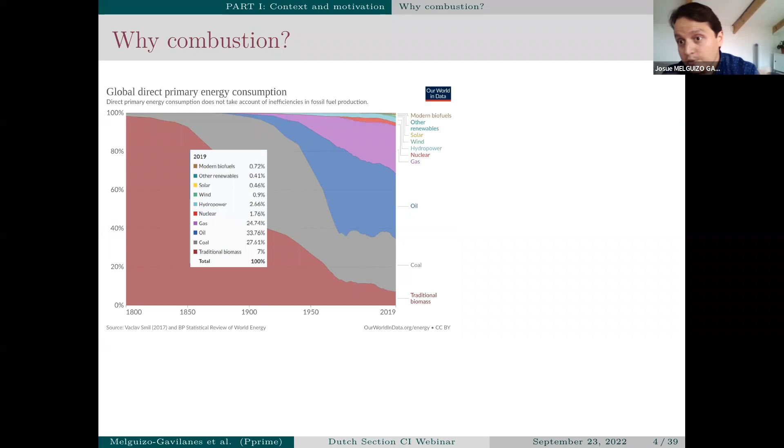So we went from wood and all these things to now a mix of oil, coal, and we continue to burn biomass. The takeaway is that we really burn stuff to sustain our lifestyle. Even though we have all this push for going electric, in the end you have a primary energy source and a primary location where you produce this electricity that then will feed all these other things. And typically, unless it's really coming from renewables, it will most likely come from burning either natural gas or coal, right?

This sounds a little bit of a pessimistic statement, saying that the picture is unlikely to change, but in the near future, what I would say we really need to push for is efficiency, right? So we've been burning things, we know how to burn them, we have pretty efficient processes, but we can continue pushing that efficiency. And one way of pushing for that is investing in low carbon or biofuels or hydrogen

enriched, which is an actual initiative in the aerospace sector, for example, or maritime, where we have significant energy demands. And then, of course, there's the carbon free, where you go full hydrogen, or you take ammonia as a carrier and then you convert it into hydrogen at some point in the process, right?

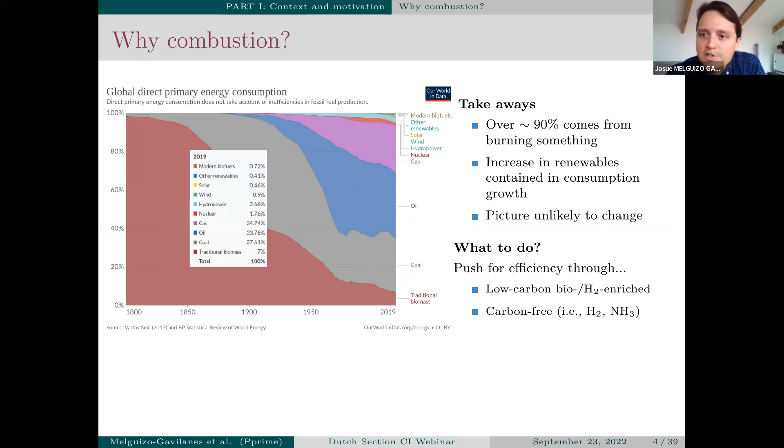But really, with this picture, there's a push for efficiency. That is not an isolated idea that those of us doing combustion are using to sustain or justify our research, but something that has actually been studied. There was a recent article in the Financial Times in which they concluded kind of the same thing I've been saying, right? That efficiency measures could be a very efficient tool to curb CO2 emissions.

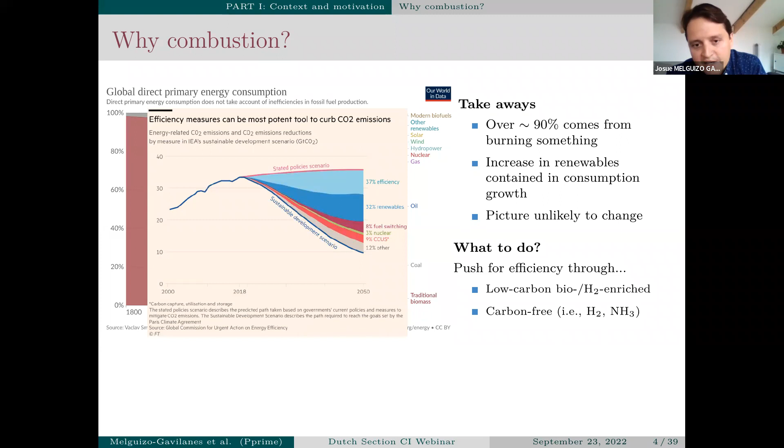So that push for efficiency that most of us in combustion are trying to advocate for, I think is definitely a valid way of achieving our sustainable development goals, right? So all this begs the question: is the future electric? I already discussed that a lot of this comes from actually burning something and then you just plug it in at home or at one of these charging stations.

And in my opinion, we really need to think inclusively, and depending on the location where you'll be using the energy and your end use, you will have a diverse mix where the actual solutions could come from or could best deliver for the needs that we have.

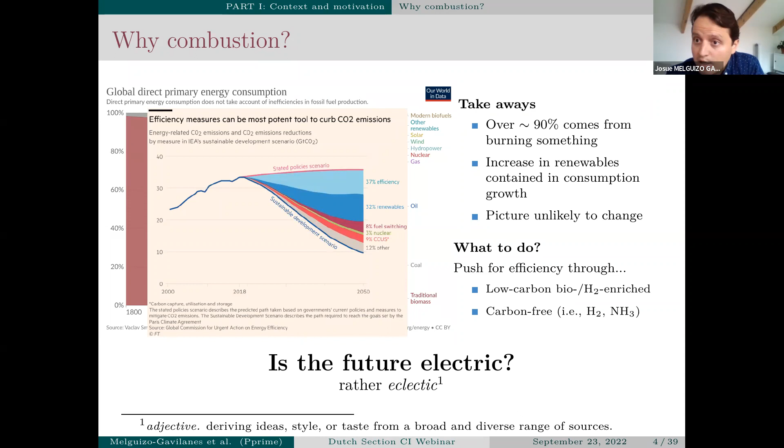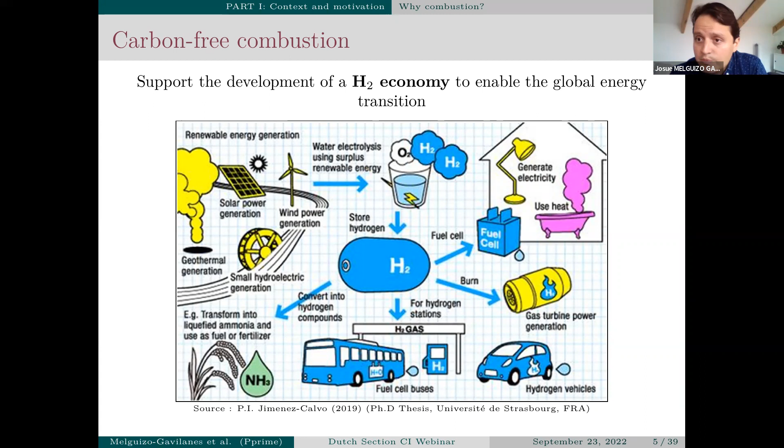Okay, regarding carbon-free combustion, this is the picture that the European Union pretty much dove into head first. It's based on producing hydrogen via electrolyzers fed by renewable energy and then trickling down the value chain to every single aspect of society. So from public transport to agriculture to residential heating, right? And of course, the potential of using it for your own cars with hydrogen vehicles.

And when you have a gas that is very light, you either have to increase the pressure to put inside a container the same amount of mass that will make it competitive with other fuels like the liquid fuels we currently use. But obviously going up in pressure could lead to potential safety issues. The other option would be, okay, let's liquefy it. But in the case of hydrogen, we need to get to cryogenic temperatures, and that's very expensive.

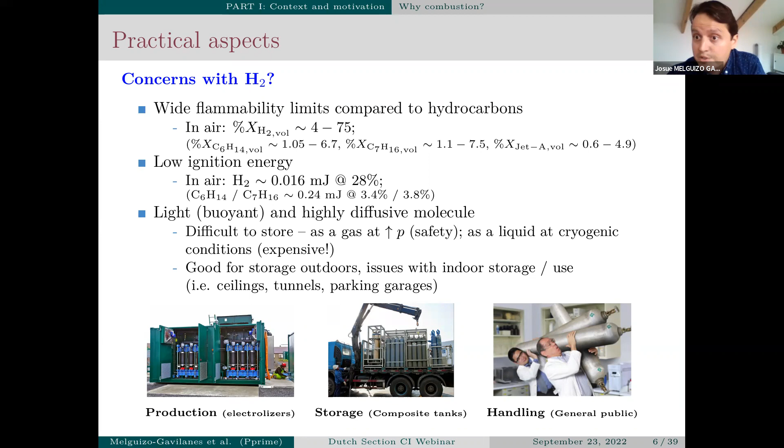Part of our job as combustion scientists is to make sure that we understand the risks so that we can relay all those learnings to policymakers and those who are writing the codes for safety distances, etc.

So you really want to make sure that when you're dealing with potential risks, you understand them properly. And the thing is that in each of these industries, and in most industries in the productive sectors, you will be handling fuels, and whenever there's a fuel present, there's the risk of a fuel leak and potential ignition.

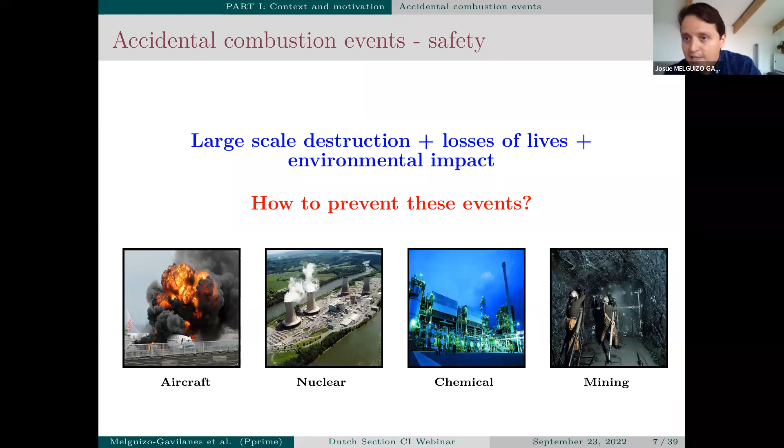So as I said, our role is to try to understand how to prevent those events, right? And this is just a bit of an overview of how an accident takes place, and I'm just going to go very quickly through this flow chart. So you typically, as I said, start with a combustible mixture that could be inside a container, right? If for some reason you have a rupture or there's a human error, whatever, this leads to a fuel release, then if there's an ignition source, that will create a flame.

If the flame interacts with obstacles, then there's an increase in surface area that will in turn increase the burning rate. If you increase the burning rate, you accelerate. If you accelerate, you could potentially transition into a detonation, right? So typically in accidents, this is what would happen. You will go through this route of thermal ignition, flame propagation, acceleration, deflagration to detonation transition, which is one of my core research activities, and then towards detonation propagation.

If you're storing those fuels at very high pressures, then you could potentially ignite a detonation directly, but this is less likely, okay? And most of the stuff that I've been working on is really motivated by safety aspects. But since my arrival to Pprime, I've also been looking at the potential application of detonations to propulsion, which I will give you a little bit of a side note on at a later slide.

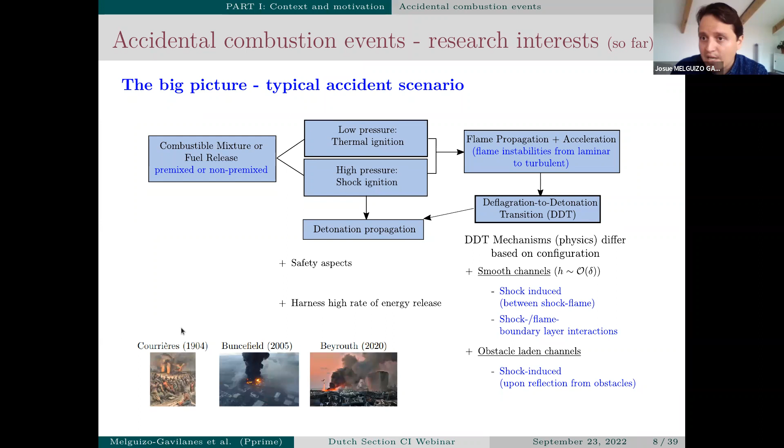And the main takeaway from this is that accidents have happened. The largest accident in France, actually, in a coal mine in 1904. Buncefield, which was an accident in the UK in 2005, in which there was forensic evidence of a potential detonation in open space. Before this investigation, people thought that detonations were very unlikely to take place in accidental scenarios, because you need confinement and you need proper reflection of triple points, as you will see later.

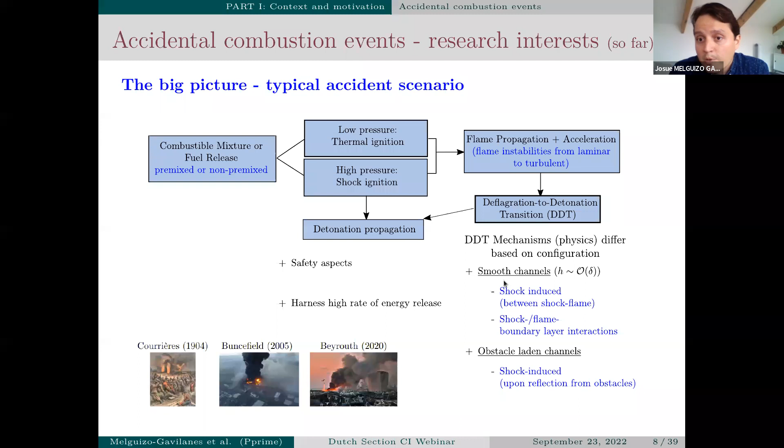And the accident in Beirut, which I'm sure you're familiar with. So that was just improper storage of hazardous materials that could lead to significant property loss and losses of lives, as I said before, right?

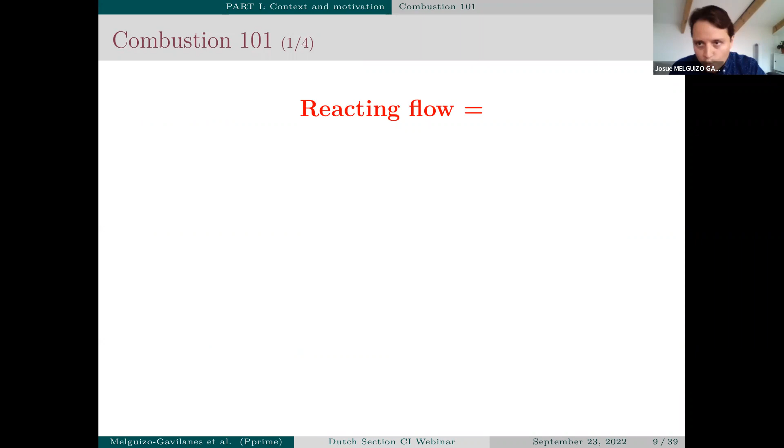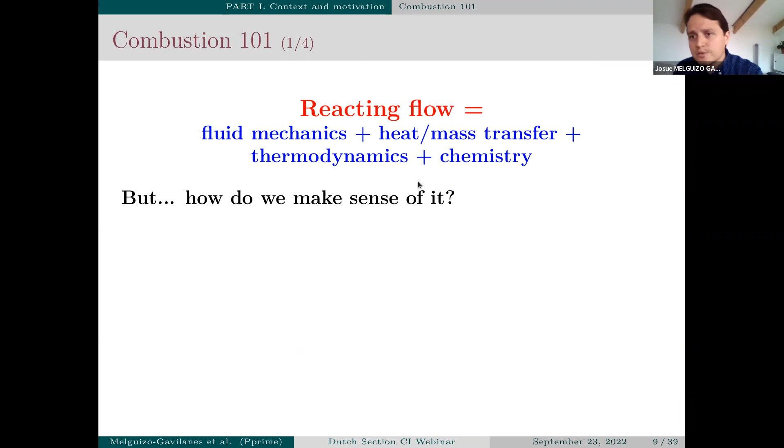So a very brief crash course on combustion so that we make sure that we're on the same page. Okay, so reacting flow, we all know, is fluid mechanics, heat transfer, thermodynamics, and chemistry. It's the combination of those four pillars of science. How do we make sense of this in addition to the typical experiments? We have continuum mechanics, right? A mathematical description of nature. So we conserve mass, momentum, species, and energy.

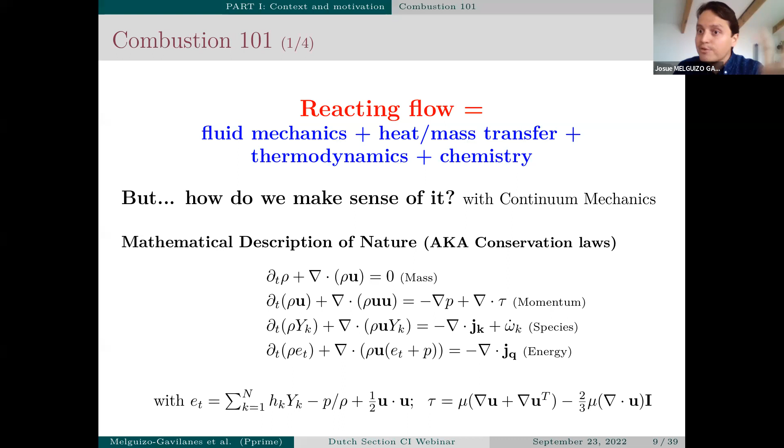And then depending on the physics that we're interested in, there are some terms that you could neglect or that you need to keep, right? Typically in detonations, you neglect diffusive terms. You're not interested in heat and species diffusion because of the timescales at which the relevant physical phenomena take place. But in the particular case that we're looking at, we will keep those terms because we're looking at diffuse interfaces, okay? So that's going to be important to keep in mind.

Now, some of the challenges are different from what you typically see in cold flows, where you can actually resolve all the scales and you have base solutions that you can use. Reacting flows are a bit more complicated because one of the most pressing issues is the size of the mechanism. If you really want a proper description of the chemistry, you need to carry a significant amount of species and reactions. And for each species that you carry, that's an additional equation in the system of equations that I showed in the previous slide.

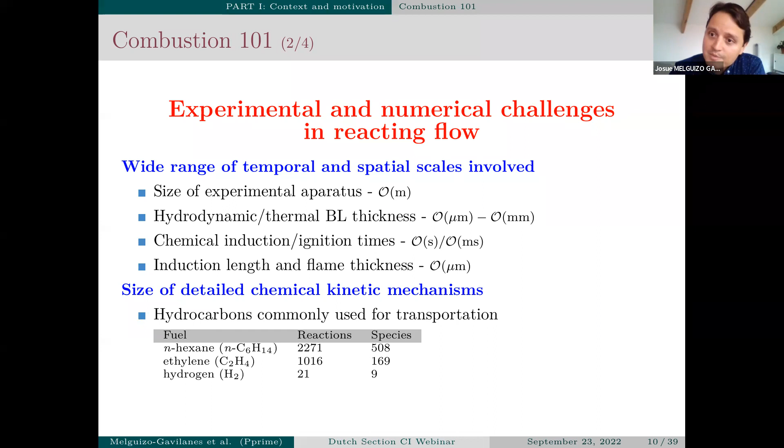And then if you want to resolve the scales, you have to go from the size of your experimental facility, or in industrial settings, the size of your plant, which could be a few tens of meters or more, depending on how much you want to simulate, to actually resolving reaction fronts and reaction zones. And in detonations in particular, it's very important to resolve the front because that's what leads to the typical cellular structure of detonations that I will explain in a few slides.

All right, so if you take those equations and you seek traveling wave solutions, you have two limits. You have the limit of deflagrations, which is what people are most familiar with, right? So the propagation physics is by heat and mass diffusion, right?

And you have detonations, which is the other end of the spectrum, where the physics of propagation is shock-induced ignition, okay? So you have a shock that brings your thermodynamic conditions to a temperature and pressure such that your reactions get initiated right away, right? So across this detonation interface, you typically have a density increase and a pressure increase, okay?

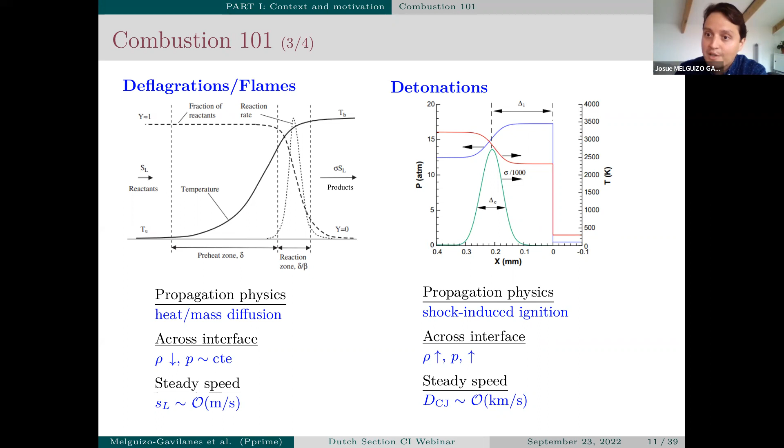And the other very important difference is the propagation speeds, right? In deflagrations, you have meters per second, or even a tenth of a meter per second for most hydrocarbons, or of that order. Whereas in detonations, you really go into the kilometer per second realm. So a 3 order of magnitude difference.

Okay, and as a result, you have different metrics that you would measure experimentally depending on what your interest is, right? So you have deflagrations, in which what you care about is the laminar flame speed and making sure that your mechanisms reproduce the laminar burning speeds that you measure experimentally. As I said, heat and mass diffusion is the driving physics. The metric of interest is the laminar burning velocity. When you're simulating this, your code has to properly reproduce these changes, and your mechanisms have to reproduce it as well.

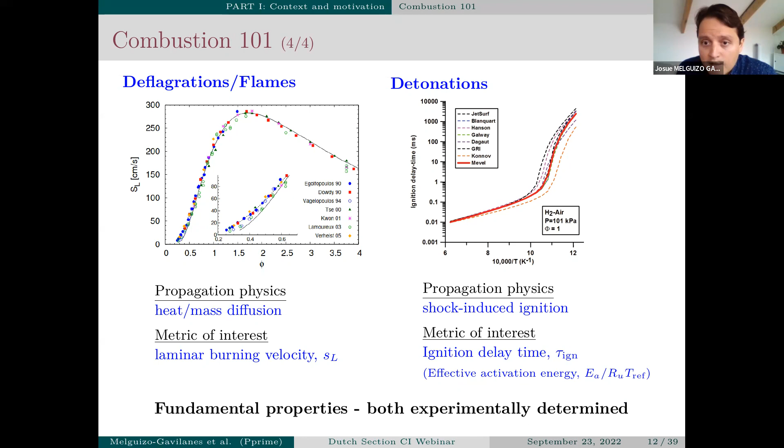Now, I would argue that most people know what a flame looks like, right? You've seen a fireplace, you've seen a candle, you've seen all this, right? But those that are not really working on detonations, I don't think they know what a detonation looks like. And even if you haven't been doing experiments or looked at images of detonations, you don't really know what a detonation looks like, right? So this is what a detonation looks like. If you put a reacting mixture inside a tube, you ignite it from the closed end, and you allow that front to transition into a detonation, and you zoom into the front, this is what you see.

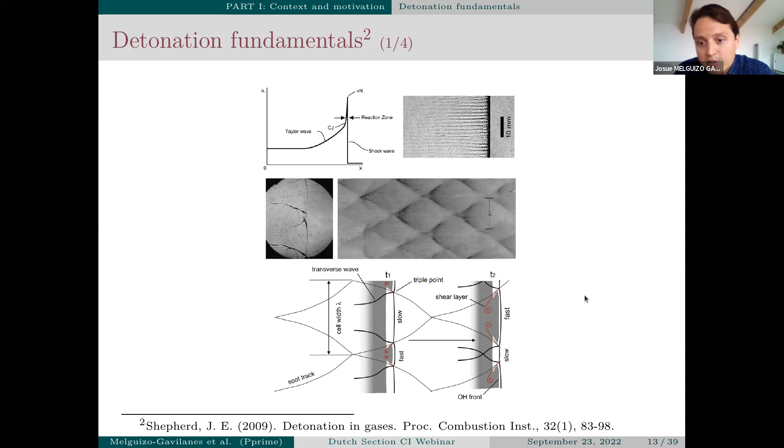Those triple points that you see kind of like right here in this schematic, as you have this collision of transverse waves, and the transverse waves moving apart as the explosion takes place within these fronts. So that's the cell size, and it's a very important metric. So we use it to classify detonations, and then you typically have regular and irregular mixtures, depending on what your cellular structure looks like. Most fuels look like this one right here.

So most fuels are irregular, and typically the activation energy that you have associated to this type of structures is what we call a high activation energy, right? Now, if you go towards lower activation energies, then you get to patterns that only exhibit one length scale. So very uniform. That's the word that I was looking for.

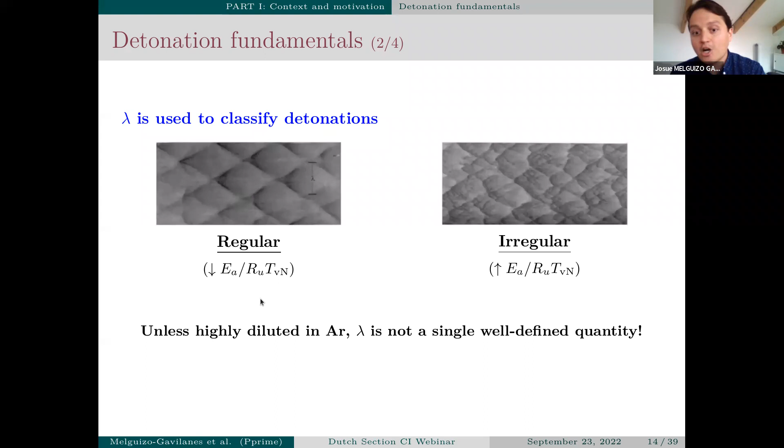So unless you highly dilute your mixture in argon, the cell size is not a well-defined quantity. And sometimes then we have to take averages, and that's what they typically do in safety engineering, you have to just rely on averages, right? As I said, this is relatively easy to measure, but there's quite a bit of uncertainty in terms of how to properly report this. Averages, in my opinion, is not the proper way to report it. Histograms would be a better way to have a better sense of what the length scales that are present in that type of mixture are.

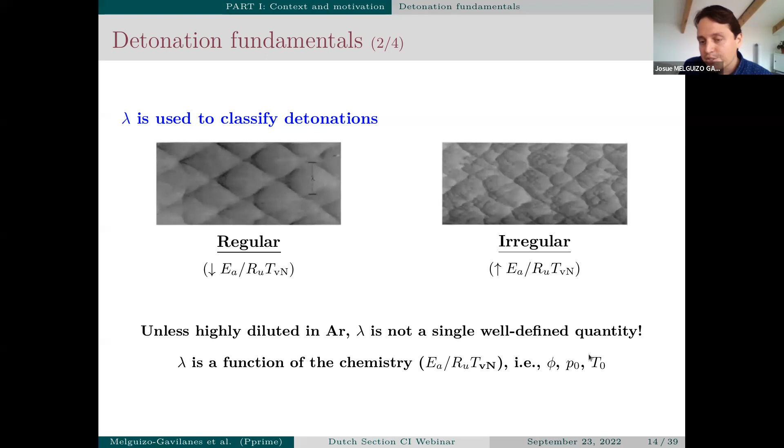But the takeaway right here is that the cell size could be either regular or irregular, depending on the chemistry, right? So if you have low or high activation energy, and that is whether you have different levels of dilution or different levels of equivalence ratio, if you have different initial conditions, then your cell size will change.

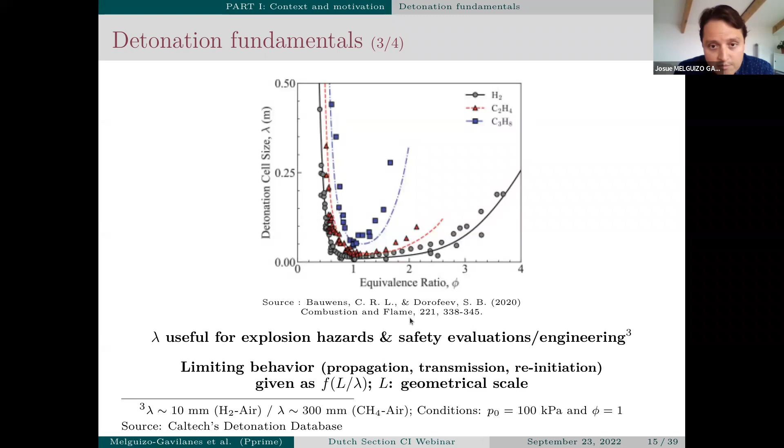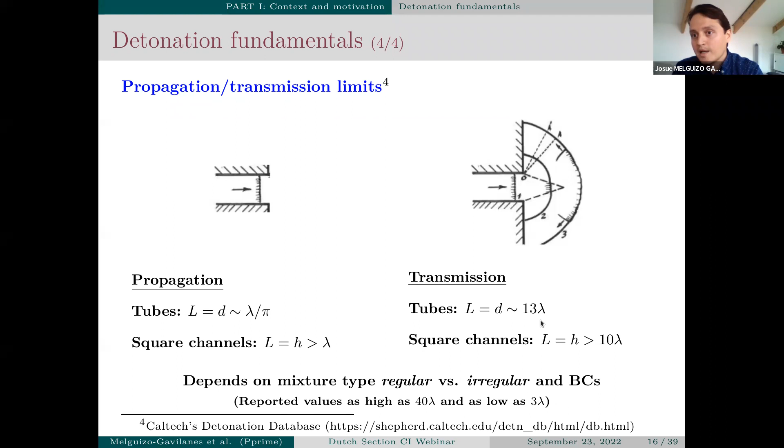The value of 3 lambda that I quote here is the value for hydrogen. All right, now we go into the talk.

So I think that right now we're in a better shape for those that haven't seen or been exposed to detonations in the past. Really, the takeaway is that detonations exhibit a cellular structure, that the physics of detonations is shock-induced ignition. So you need a strong shock to make sure that your reaction is initiated. And that depending on the chemistry and the equivalence ratio, your cell size increases dramatically as you move away from stoichiometry.

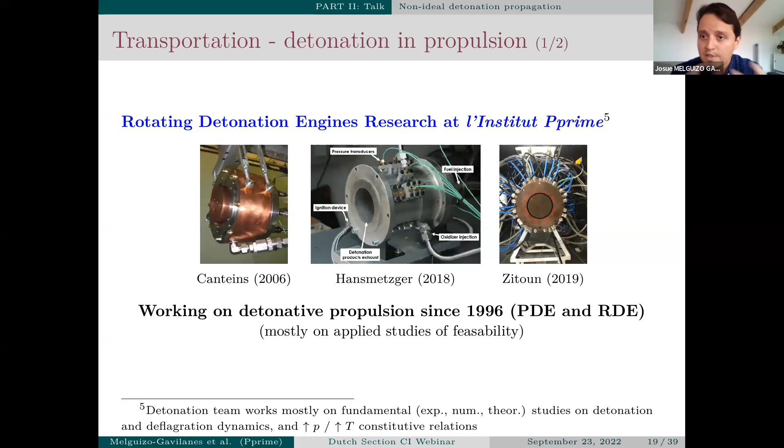Okay, so we'll go into this non-ideal detonation propagation and the actual talk. But before that, a small parenthesis just to show a very interesting application of detonations as well, which is the fact that you can put these detonations into actual combustors, and those detonations could produce significant thrust. So there's been a significant effort in the team, in the lab at Institut PPrime, trying to understand and trying to contribute to the fundamentals of rotating detonation engines.

And some of the issues that you see in these rotating detonation engines, which in their simplest form is simply two concentric cylinders. So you have one cylinder here and one outer cylinder, and then a detonation that propagates in that gap, right? They typically call this pressure gain combustion. So the pressure that is generated behind the detonation wave and then the expansion of the combustion products lead to thrust, right? But as you can see, you have significant non-idealities in this type of flows.

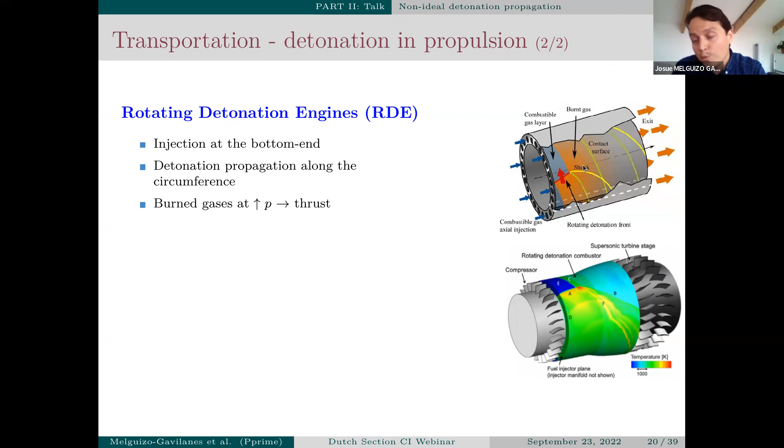And one of the applications of the canonical configuration that we'll be studying is also observed in this type of engines, which is the fact that you're confined by a layer of burned gases. So this would be a detonation that propagates, and depending on the conditions here, you have a minimum height that will allow the steady propagation of that detonation. So as I mentioned before, there's a lot of non-idealities in this type of flows, but some of the canonical configurations that you find in safety applications, you also find in this type of engines, namely the fact that you have confinement by a gas.

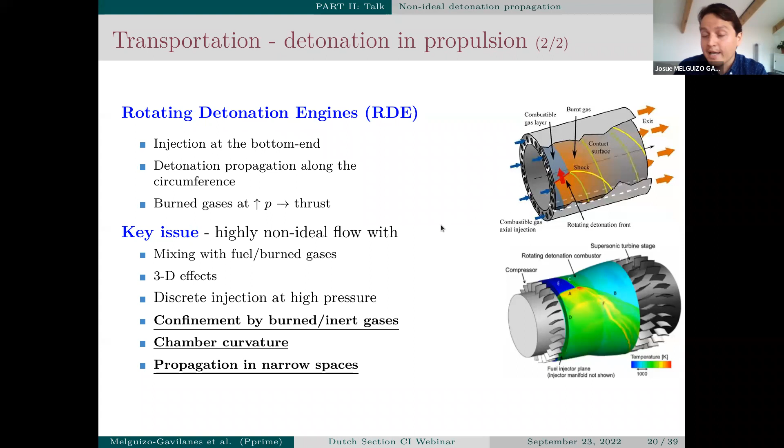So the overarching goal, actually not of the talk, but one of the goals that we have in the team, is to gain fundamental understanding of non-ideal detonations, right? And the way we do this is we combine experiments with numerical efforts. We try to come up with configurations that are canonical enough so that we can learn from them. In this particular case, I call it semi-canonical because there's a lot of variation, and you'll see.

And some of the questions are: can we predict what we observe experimentally? Do we understand the physics enough, or have we included the physics necessary to predict what we see? And then can we reproduce the observed transmission and propagation dynamics?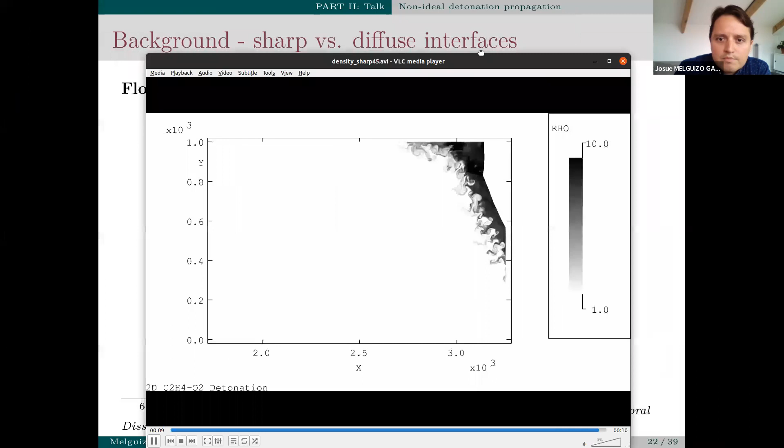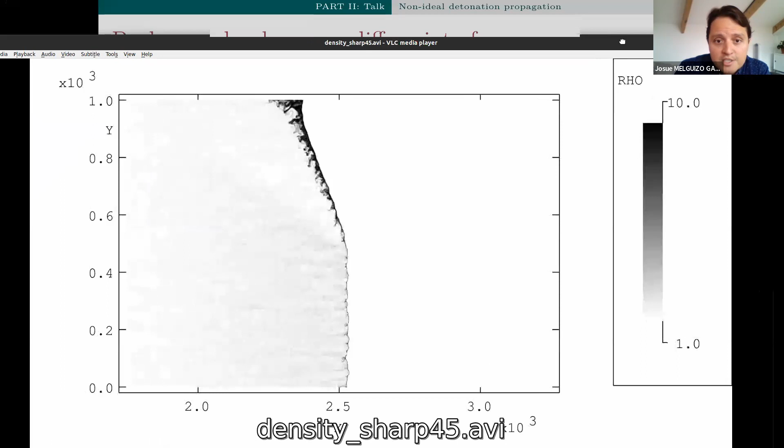Okay, so this is the video of a detonation interacting with a sharp interface at 45 degrees, and really what's important to show here is the coupling of the reaction zone with the detonation wave. You see, this is an oblique shock. Right there is where the interface is located. And then, of course, because you have no reacting flow where the interface is, this just continues to separate.

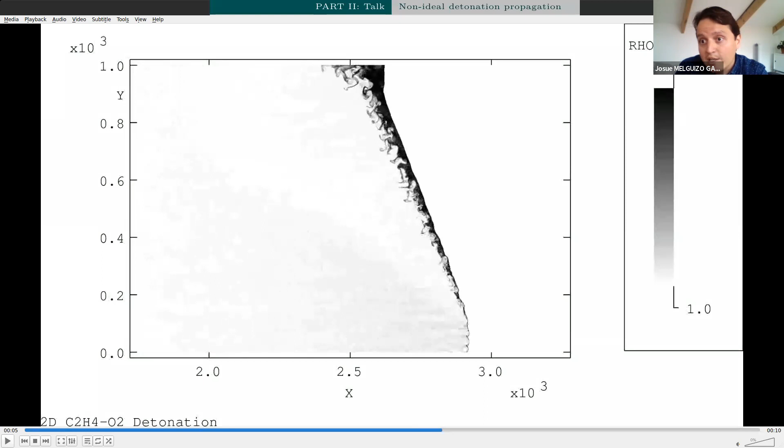So this is the coupling right here between the shock wave and the transmitted shock wave, and regions of that could potentially lead to reactions is what leads to quenching. And then the dynamics is a bit different for a diffuse interface, right? Right here is where the reacting mixture is. You see a transmitted shock and then some regions of what you would call a turbulent mixing zone.

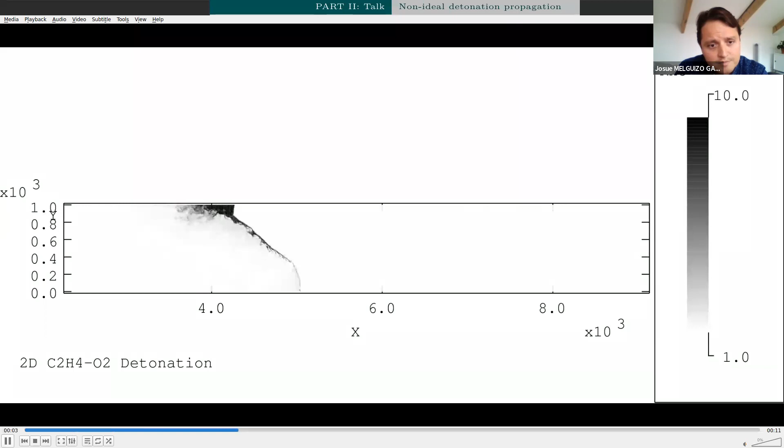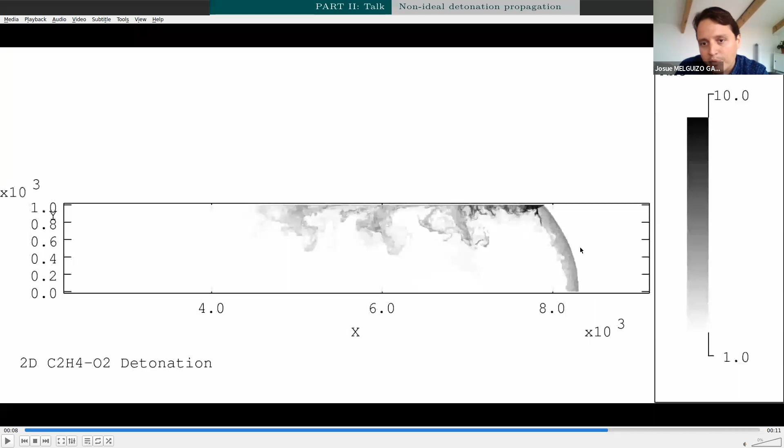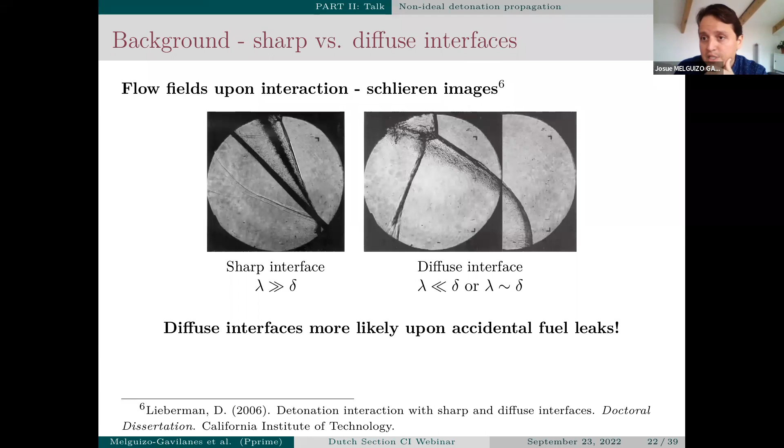And as you move away from where the gradients are, you see the coupling of the leading shock with the reaction zone, okay? So ultimately, what will lead to failure is if your leading shock decouples. And of course, this decoupling took place because the detonation was transmitted into an inert region. Diffuse interfaces are more likely upon accidental fuel leaks. So if you have a leak, what you would have is really a diffuse interface rather than this very lab type configuration.

And I touched upon some of the issues with using lambda to characterize behavior, right? So we said that it's difficult to measure experimentally because if you have layers that are changing, it's not uniquely defined. Properly capturing the variation between the diffuse interfaces is complex. Then you need to resolve the detonation front. So if you're really interested in industrial size facilities, then that becomes complex.

And if we look at implicit models, then we really have a lack of energy dissipation mechanism, diffusive processes as I showed, and the fact that if you have no diffusion, your solutions do not converge. But even if you were to neglect diffusive effects, you do learn quite a bit, which is typically what you do in the detonation community.

Okay, so now we go into the actual meat of our talk. So diffuse interface interaction, and really what we want to find is what is the critical cell size gradient that leads to quenching. This work was published in the Proceedings of the Combustion Institute, not the last one, but the one two years ago in Australia. So we want to examine failure and reinitiation mechanisms. This is the experiment that we're targeting.

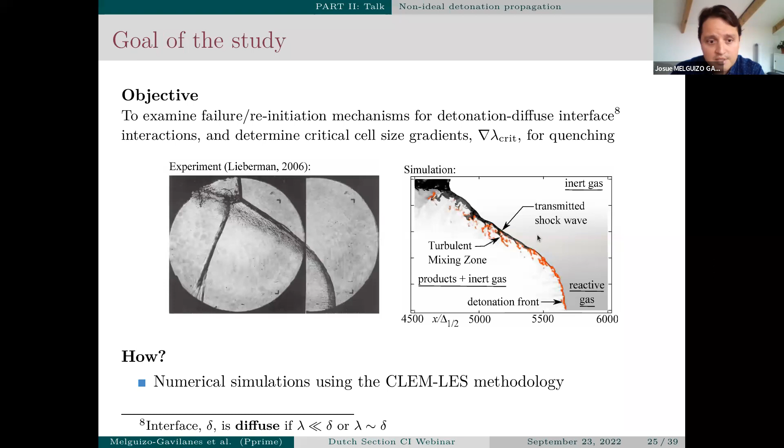So we're going to use the CLEM-LES methodology. I'm going to go very quickly over this. It's been one of the only efforts in the detonation community to bring LES simulations into the community. It relies on the linear eddy model, reformulated to take into account compressible flows. You resolve all the small scales, so your subgrid relies on a one-dimensional diffusion reaction problem, and it's been validated by my colleague, Maxwell, in his thesis and in works that deal with detonation in channels and some DDT.

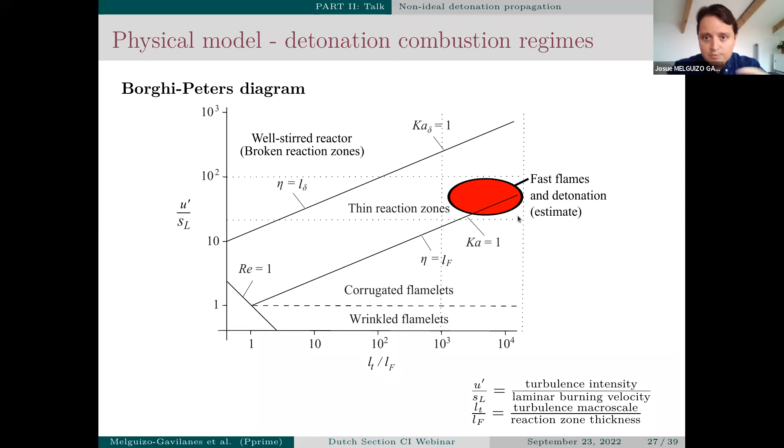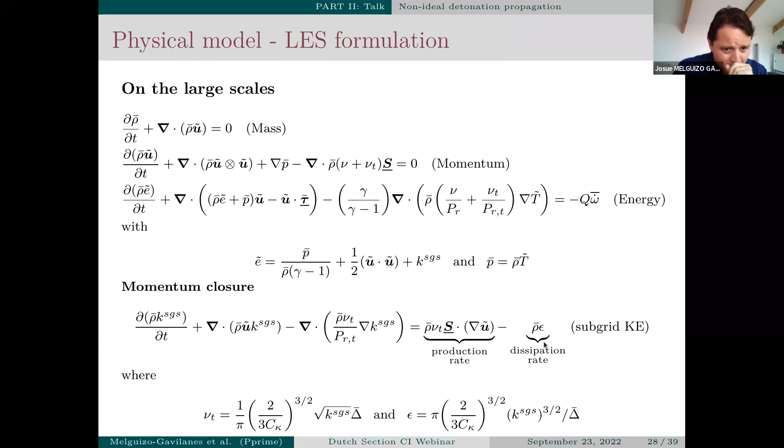This is typically where, in the Borghi diagram, for those more into turbulent combustion, our combustion regime lies. This is just so that you see where we're looking, and it's the standard filtering LES on the large scales. We have standard momentum closures and reaction rate closures on the small scales given by these expressions here.

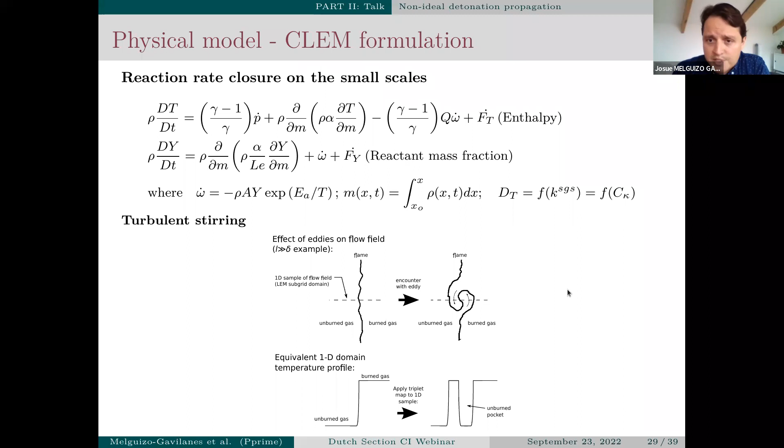And one thing to keep in mind is that we have this concept of turbulent stirring, in which we take a 1D profile in the subgrid, and then we take what a 1D profile would look like if it had interacted with a vortex. And this is what you then use as part of your subgrid. If you want more details, there are papers and a full thesis in which the entire framework is presented.

So we touched briefly on some of the challenges. If we really want to model this at industrially relevant scales, we need some sort of modeling. We can't really do it with DNS. It's very expensive because of the length scales we have, because of potential diffusive processes that might be important, especially with irregular detonations, and the fact that lambda is not uniquely defined, even if you don't have gradients.

And then, of course, when you try to model this with geometries that are of significant size, then you need to find a way of making it tractable and cost efficient. So one way of doing it that is quite popular in the detonation community, and that I've been trying to actually move away from, but in this particular work we stayed with it because of the size of the problem, is that we typically reduce the chemistry to a one-step global mechanism.

Okay, and then we have some parameters that we want to look into, because we also have the diffusive terms. Then we're not only targeting the induction times, but we're also targeting what the burning velocity would be in the post-shock conditions for shocks that are propagating at half the steady propagation velocity, which is called the CJ velocity. And then, of course, there's some calibration constants that are used to reproduce the cell size, right?

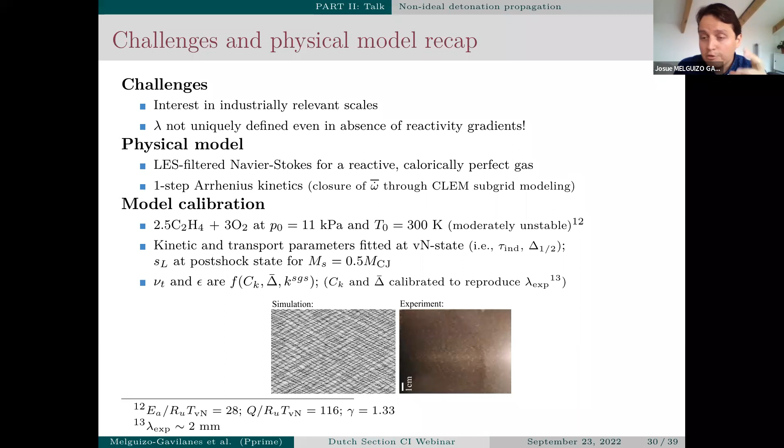So this is what the simulation gives in terms of cell sizes. This is what the experiment gives. And the cell size is of the order of 2 millimeters. And the diffuse interface that we're looking at has thicknesses, you will see that the thickness varies depending on where we are, but on average they are of the order of 3.5 to 4 centimeters, right? So we lie within the definition of a diffuse interface.

So this is how the simulations are carried out. They're 2D. We compute a gravity current using OpenFOAM with proper diffusion and transport. That's to make sure that we reproduce the thickness properly. And then we take those fields, and we use the methodology that I described to then look at the detonation diffuse interface interaction.

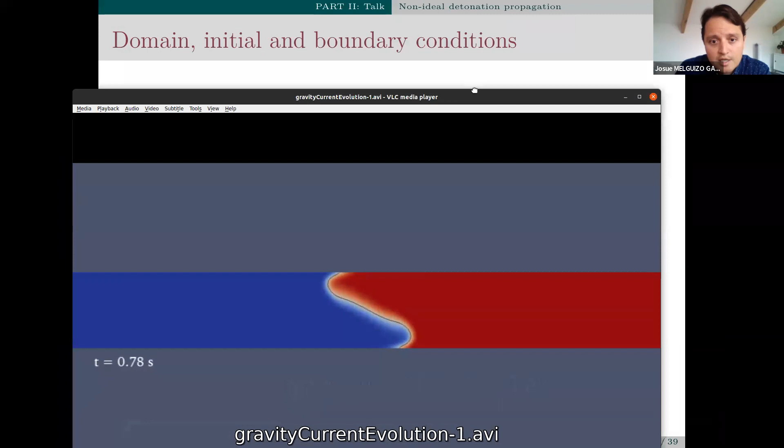So this is how the gravity current initiates, right? So we start with the actual ethylene mixture right here at the actual composition that was used in the experiment, and we allow it to propagate into nitrogen, which is what they had in the experiment, and then we allow for the gravity current to develop.

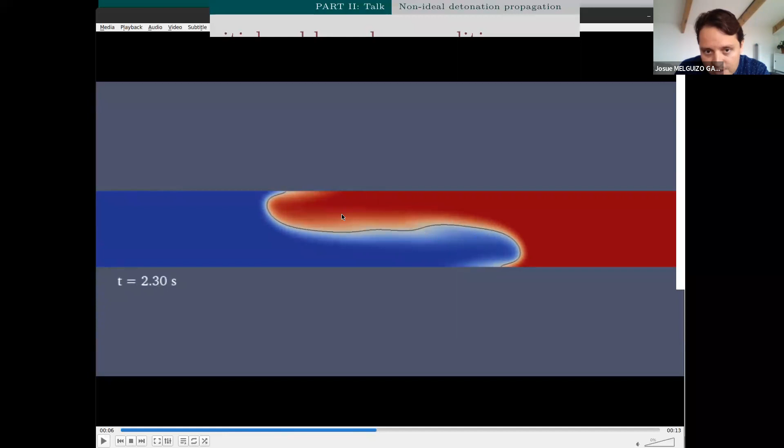Then we take two instances in which we are going to look at the interaction. So at t equals 1 second, over here roughly, and at t equals 2.2 seconds, just because they're representative of the actual waiting times that they had in the experiment. And as you see, there's differences in the thickness, and then we map this to use as initial conditions in our simulations. And then, of course, the speed of the gravity current was measured experimentally at the lab, so we made sure that our simulation captured properly the propagation speeds of the head of the gravity current.

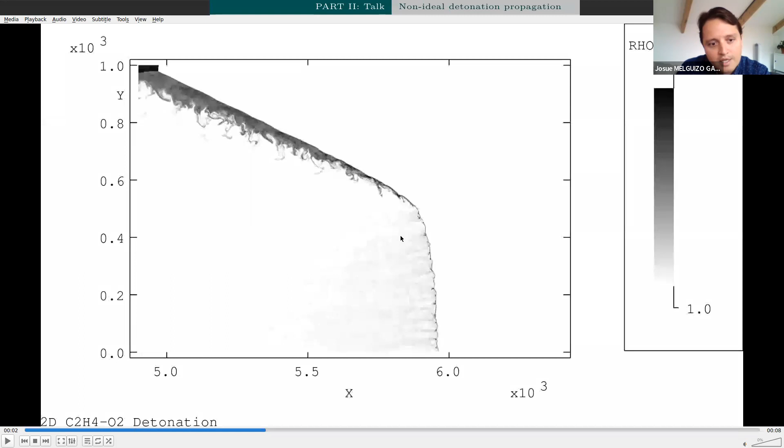And the outcome is that, wait, I think I'm playing the same video, sorry. Yeah, okay. We'll see a video after.

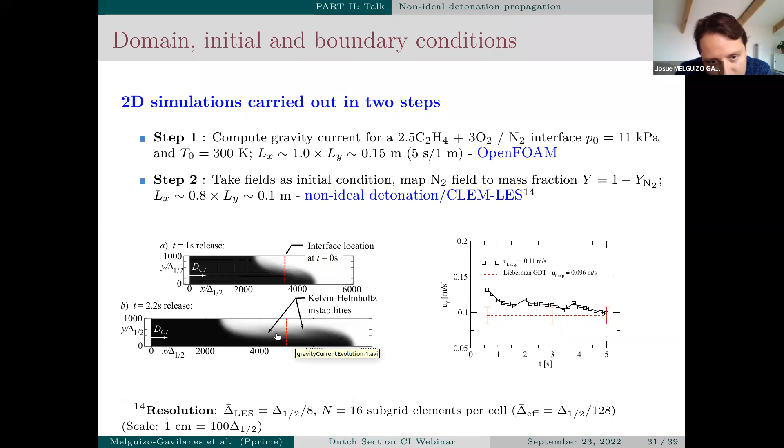So what we see here is right where you have the reacting mixture, you see a very uniform pattern if you have a sharp interface. But if you have a diffuse interface, what you see is that depending on the thickness, and as you saw the evolution of the actual initial condition, you have a different thickness here, then here, then here, and then here. So depending on the value of that thickness, you will have different dynamics, and you see some of those triple points actually running away into the interface, and sometimes leading to reignitions or quenching.

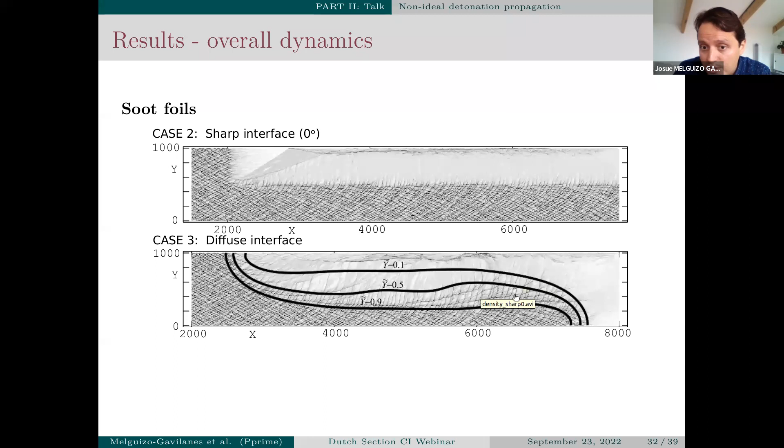Okay, so the diffuse interface exhibits quenching and reinitiation in the diffuse layer, which would be, say, in between my mass fraction 0.9 and 1, whereas in the sharp interface you really see no triple point transmission, or not as evident as what you see here.

Now, because we're using simplified chemistry, we need to map my reactant, which is the single step kinetics that I'm using, to the actual size of my detonations, right? So for that, we had to run extra simulations to be able to find a proper correlation between the cell size and the amount of reactant that I have, right? Because the fact that we're using simplified kinetics doesn't allow us to actually have equivalence ratio changes. We can only somewhat include dilution changes by doing an exercise like this.

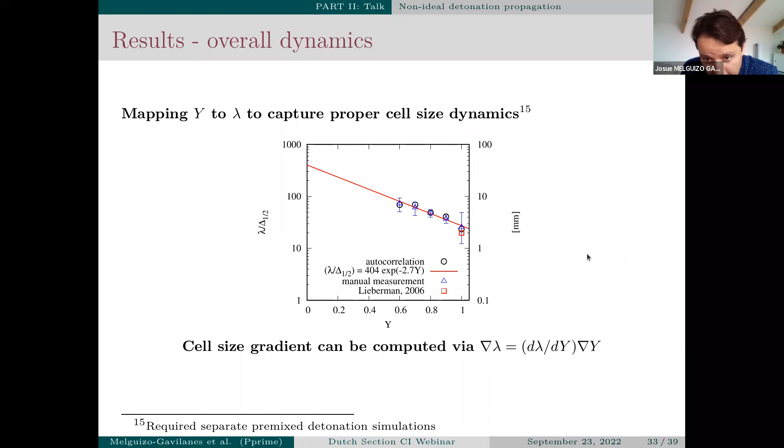So then with this, we can compute a gradient of cell size that then allows us to map on those soot foils where you see most of the cellular activity. So if we compute the gradient of cell size, if you look at the case at 1 second, you start to see some activity, or most of the activity is enclosed for gradients below 0.5. You kind of see the same for a more fully developed diffuse interface, but you see a lot of activity right here. So in between 0.1 and 0.5, you see quite a bit of triple points that are being transmitted.

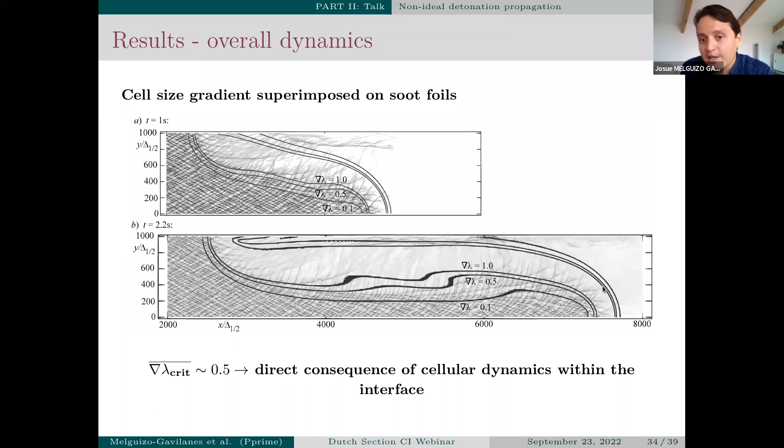So the critical, or the average critical cell size gradient that we find, so most of the cellular dynamics is enclosed for values below 0.5, is really a direct consequence of the dynamics within the interface. And most of the more conservative metrics that they've been using, and some previous work have suggested, is the use of a cell size gradient of 0.1 as indicative of failure. But depending on the thickness of your interface, that could lead to actual cellular dynamics taking place within that interface.

So how do we determine the actual critical cell size gradient? The way of doing it is, we found on the soot foils the maximum vorticity, and then we can map the gradient that we found to the place where the cellular structure stops. So that's pretty much the intersection of this line, because right there you have no fluctuations, and then you see where the actual gradient lies, and we can find that and define it at every single location along X.

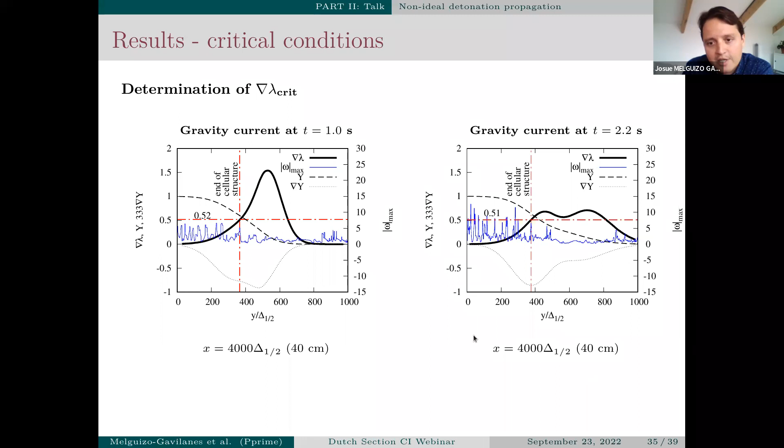And then if we do that, we can plot pictures like this, where it tells us what the critical gradient is along X, because we have different thicknesses, and then we can also plot what the critical cell size gradient is as a function of interface thickness using these results. And what we find is that the thicker your interface is, the more likely you are to lead to potential transmission and reinitiations.

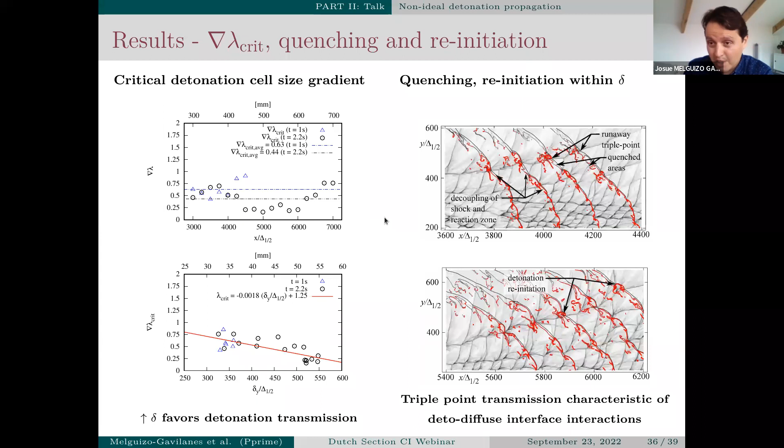And what this plot shows right here is precisely that: the dynamics within the interface that leads to runaway triple points, quenched areas where no reactions are happening. So red is a proxy for the regions where reactions are happening. And it could be that two of those triple points actually meet, and you can reinitiate a detonation within that interface. So triple point transmission is characteristic of detonation-diffuse interface interactions, which is different from sharp interface interactions, where most of the triple points reflect, as you saw.

So applicability: in agreement with previous work, the thicker the interface, you favor transmission. These values are not to be taken as hard limits because they depend on the thickness of the layer, as I showed. There's an inverse dependence: the thicker the layer, the smaller the gradient. The previous criterion of 0.1 is good for regions where undisturbed propagation takes place, but 0.5, which is the metric we found, actually accounts for the cellular dynamics within the interface. So the range of scales in lambda needs to be accounted for, especially for irregular mixtures. And values may change if more complex descriptions of the chemistry are used.

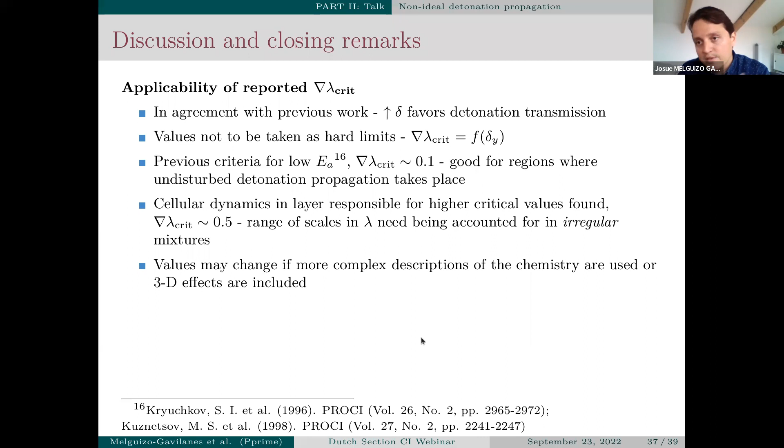So we've actually looked at the critical heights for detonation transmission, and we've seen the significant difference that exists between simplified chemistry and detailed kinetics. But as I said, because of the size of the computation, we had to compromise somewhere, and this still leads to some interesting conclusions. Some of the future work is to investigate more canonical configurations. The reason why I call it semi-canonical is because we have a variation in interface thickness.

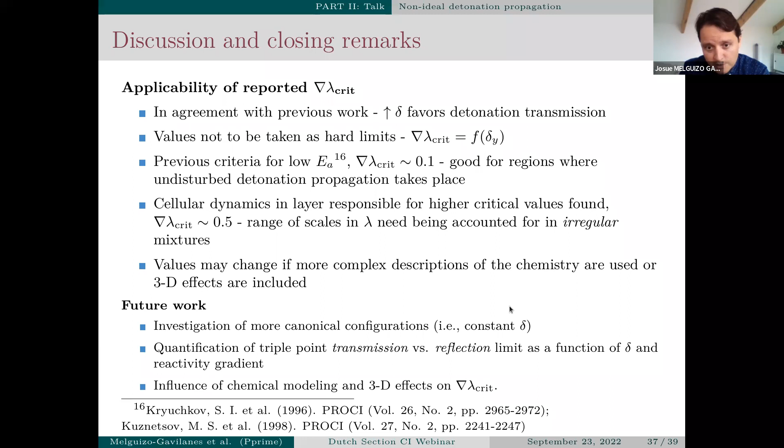So one could think of more canonical configurations where you keep that interface fixed and look at the limit between transmission and reflection of triple points as a function of interface thickness and acoustic impedance, which is also an important metric in reflections of triple points. And as I said, influence of chemical modeling and three-dimensional effects. So that's where we're trying to really push at this point.